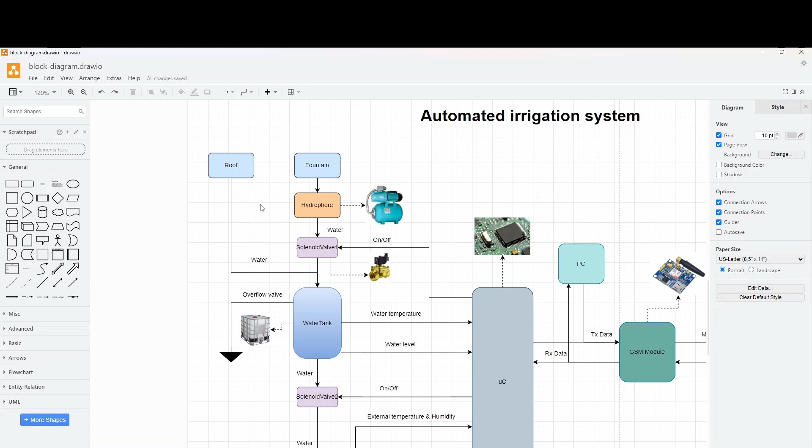Let's start. First of all, we need to address what is our main water source. We know that the irrigation system is meant to water some plants or be used in agriculture. In my case, I have two main water sources. The first one is water from the roof, which will be stored in a water tank.

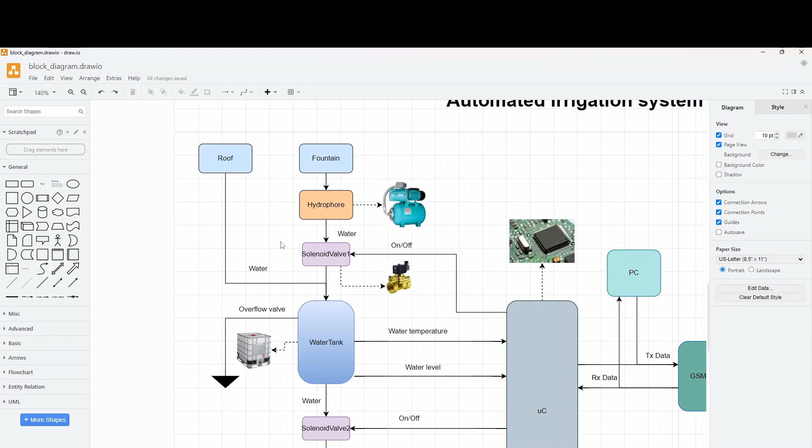The second water source, used when there is no rain outside, is a fountain. This fountain should be at the location where the automated irrigation system is implemented, with a mounted hydrophore. When emptied, the hydrophore will automatically start and store a couple of liters of water, so we can control it and fill up the tank.

So basically we identified what our water sources are. This control of the hydrophore will be done with a microcontroller, which will control a solenoid valve and turn it on or off based on some logic implemented inside the silicon.

The next step would be to see what we need as a sensor set for our system. First of all, we need to read from the water tank. For whatever logic we implement inside the microcontroller, we need at least a water level sensor, and besides the water level of the tank, we will also need the water temperature.

We know it is better for some plants to be watered with a water temperature suitable for irrigation. For example, you cannot water the plants in the mid-sun with cold water. So it's better to track the temperature of the water, and maybe postpone the schedule to water during the evening or in the morning.

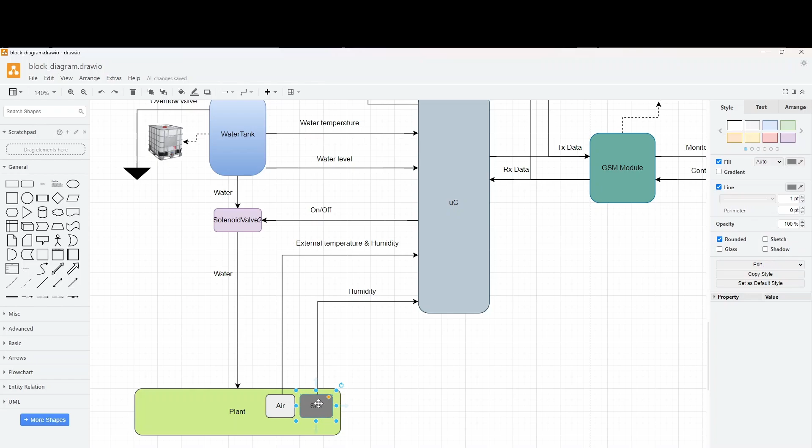Moving on, besides the sensors addressed for the water tank, we will also need to monitor something from the soil and from the air. Basically we will start with a humidity sensor for the soil, because usually each plant needs a certain humidity to thrive. So for sure we need to track the humidity from the soil.

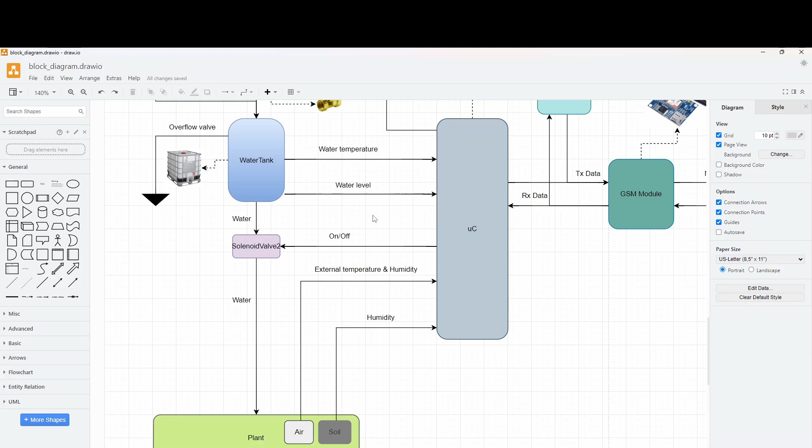Also, in the logic I mentioned earlier regarding outside temperature, we need to make sure that humidity and external temperature from the air are also tracked, and include this together with the water temperature in the main logic for the microcontroller, in order to create the best and optimal environment for the plants. The requirements for this logic will be addressed later, but we want to basically track the earth, air, and water sensor sets. It could be more or less, but usually we address three types of sensors: from the earth, from the air, and from the water itself.

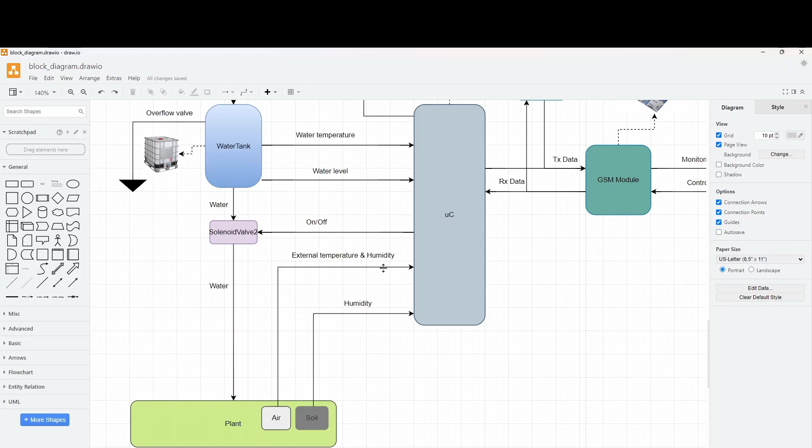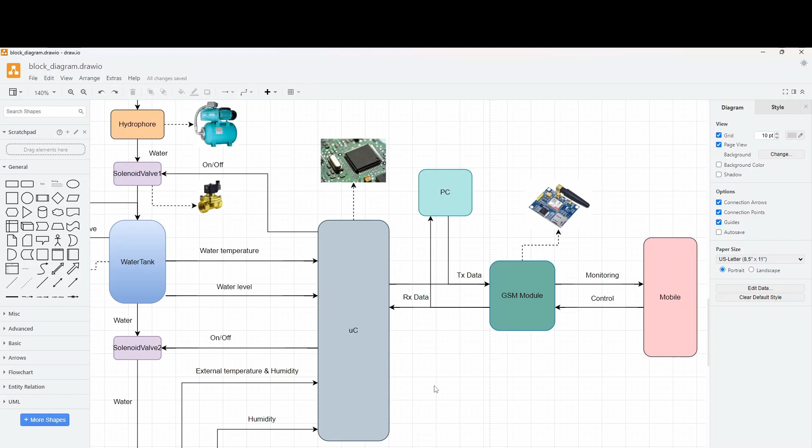Now, for monitoring and controlling the system, we will use two options. One is remote. One solution would be to use a SIM module, a GSM module basically, where we send AT commands.

These AT commands will be implemented in the microcontroller and correspond with the GSM module, and the GSM module will give us the information we request via mobile. This will be addressed in particular detail later on, but this will let us control the system from a distance without the need to be at the location.

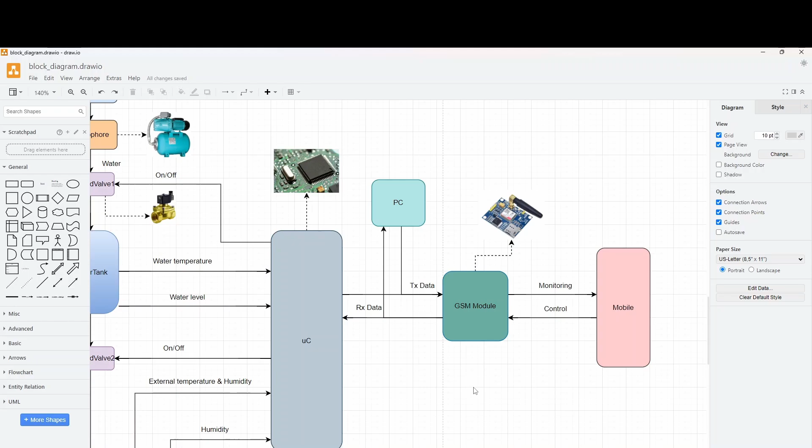Then of course it could also be controlled via wire, locally. A PC, if connected, should use a communication protocol, basically UART, a serial one, which could also be done locally, but this would be optional.

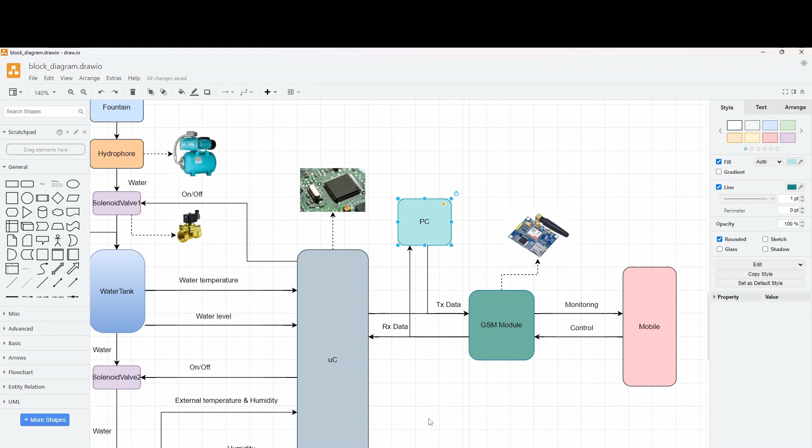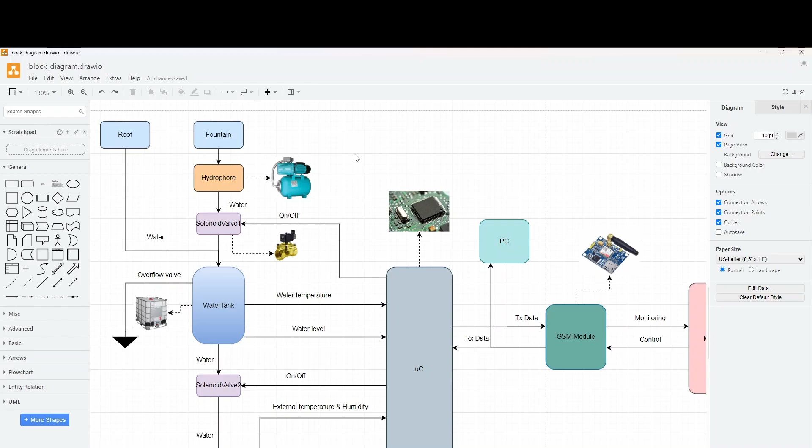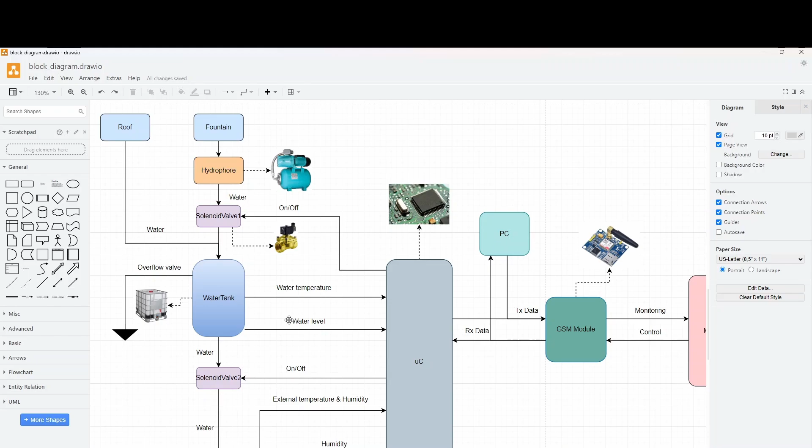This should be enough as a starting point to implement. Of course, even if it seems small and simple at the beginning, addressing each connection, each reading, and driving the correct actuators will take effort to implement this system, and for sure it may change a little bit during the development phase.

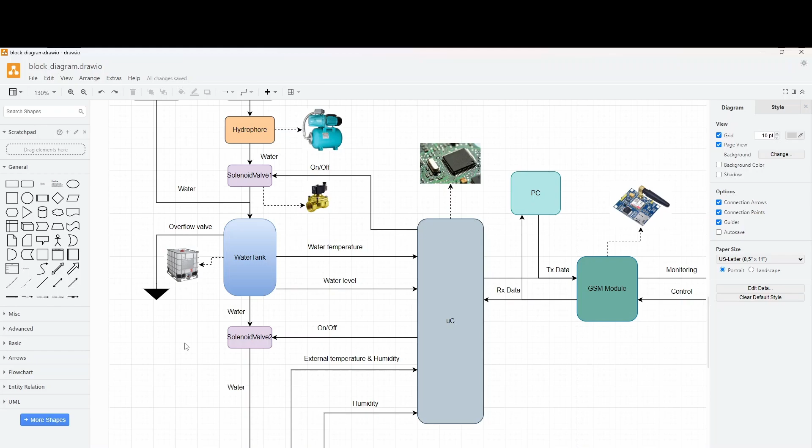An important aspect I did not mention is the overflow valve, which will be a mechanical one that doesn't imply any logic. It should be added in case the roof water gets too much and fills up the tank. This excess water will be drained out through a water valve.

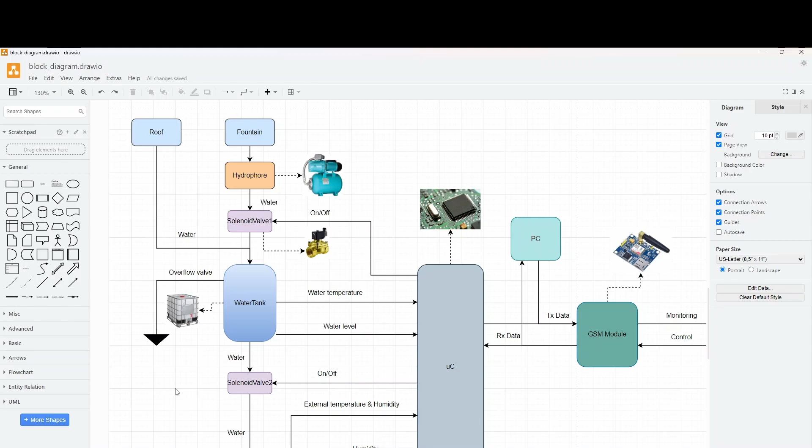So basically this is all. What kind of sensors, actuators, and microcontroller class will be used will be chosen later, but this is only the system overview and should be enough as a starting point.